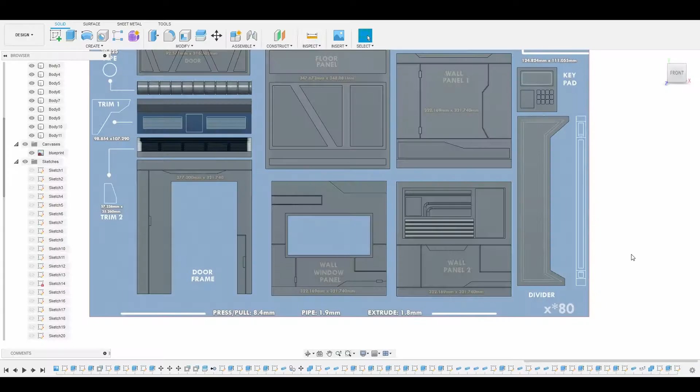Welcome back, guys. So let's begin with the divider. Now this is going to be really quick and simple.

Let's select the surface and right click, go to create sketch. And let's use our offset tool, which is the letter O on the keyboard, or you can go up to the top and select the icon. Now we're just going to dial this down to somewhere around here. Right click, hit OK. And we're going to right click and go up to repeat that offset command.

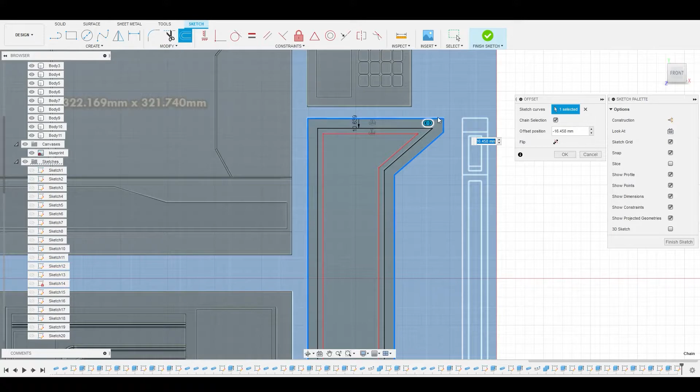We're going to select this outer border again. We'll just dial this down even deeper to follow that reference. And now we won't grab this inner piece or the outer piece, but instead this middle piece. And we'll press pull this by -1.8.

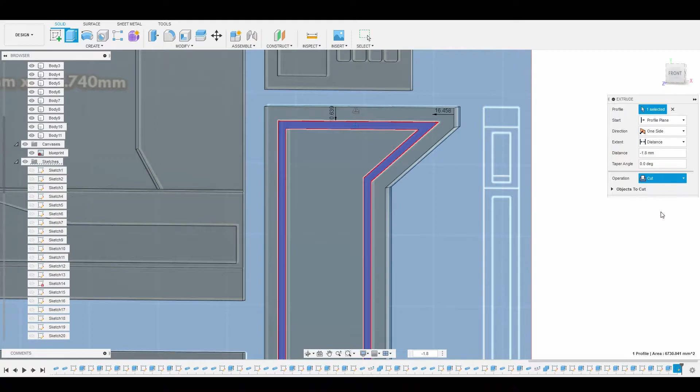And instead of changing the operation to cut, let's do a new body so we can mirror this. So if I toggle off the canvas, we need to mirror this body to the other side here, because this will be the divider between the different panels.

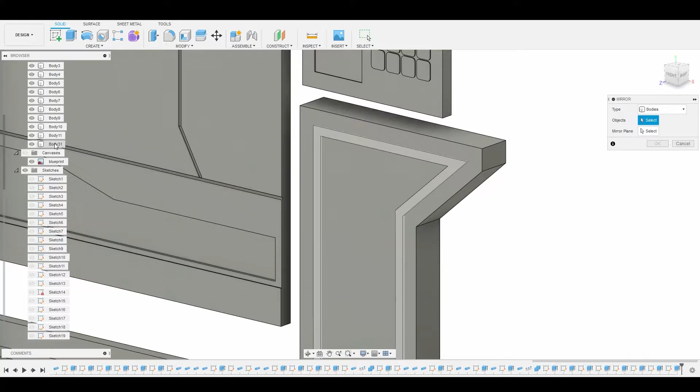So let's go to create, mirror, ensure the type is set to bodies, not faces, and let's select this body here. And if you can't select it here because of the overlap, you can just go to the bodies layer and select the one all the way to the bottom. And now where it says mirror plane, let's select that and let's choose this plane here. Now quickly you see it's on the other end, so let's hit OK.

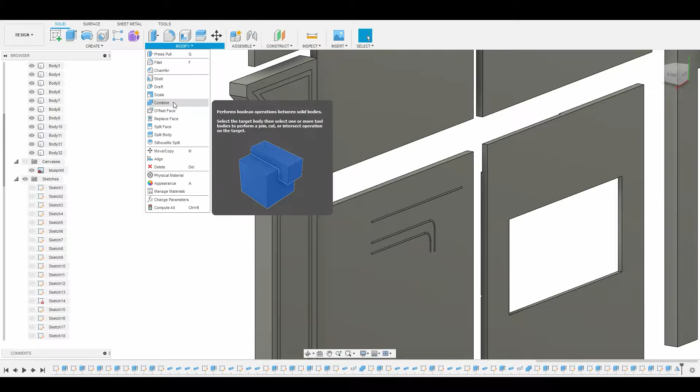Now we can combine this main piece with the two bodies. So we'll go to modify, combine, select the main body. Then we can go to the bodies layer and select these two at the bottom. And quickly you see it's highlighted red, indicating it's a cut. So to confirm that here, let's hit OK.

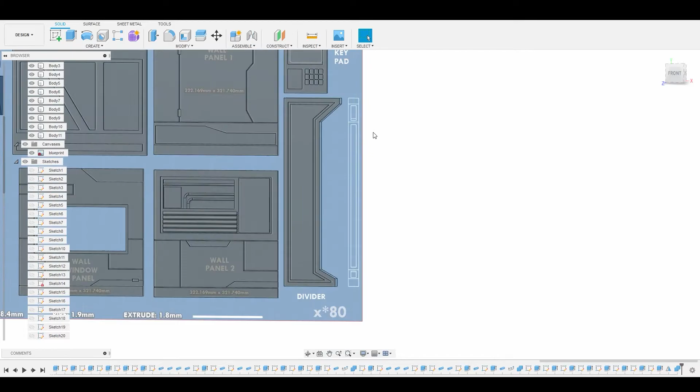Now we can toggle back on our canvas. Now let's get this frontal detail here. So what I'll do is select this surface, go to create sketch,

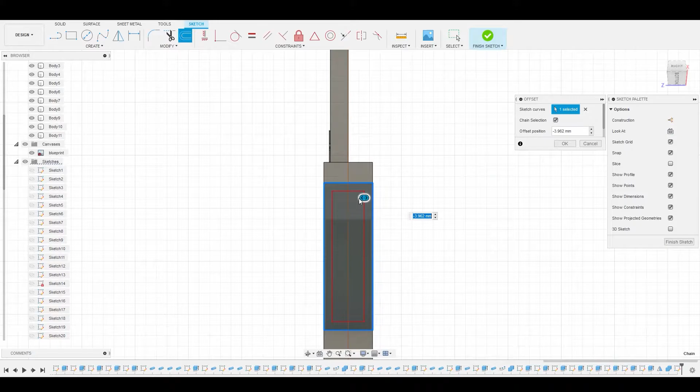Use the offset tool, and I'll just offset this by somewhere like this, -3.9. Let's hit Control C to copy that offset command, and let's hit OK.

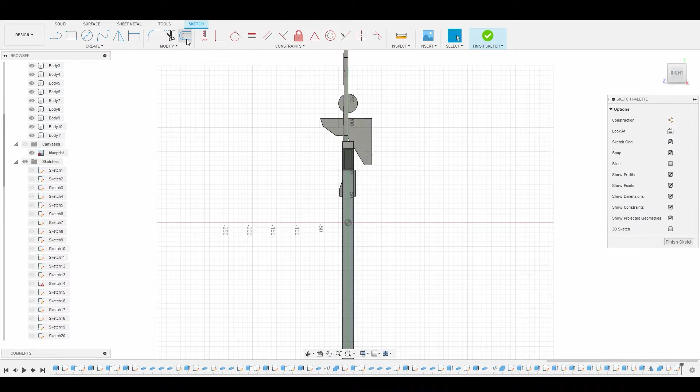And I want to do the same for this area, so I'll finish sketch. And I'll toggle off the canvas for this point. I'll select this side face here, right click, go to create sketch, select my offset tool, now select the border, and we already know that I copied the last parameter, so all I have to do is hit Control V to copy and paste that offset from the previous offset, and I can hit OK, finish sketch.

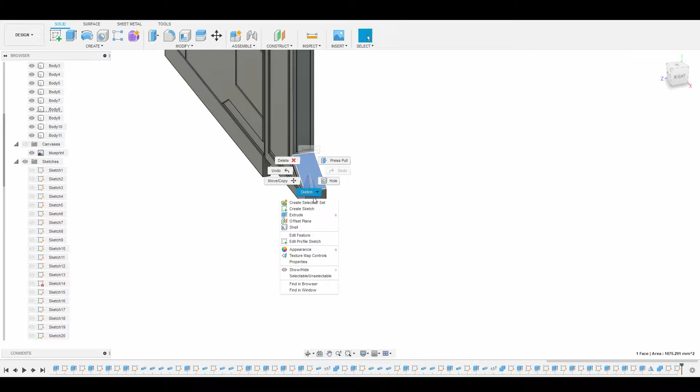And I'll do the same for the bottom piece here, so I'll select this surface, right click, create sketch, select my offset tool, now select a border edge, Control V. Just that simple. Let's hit OK.

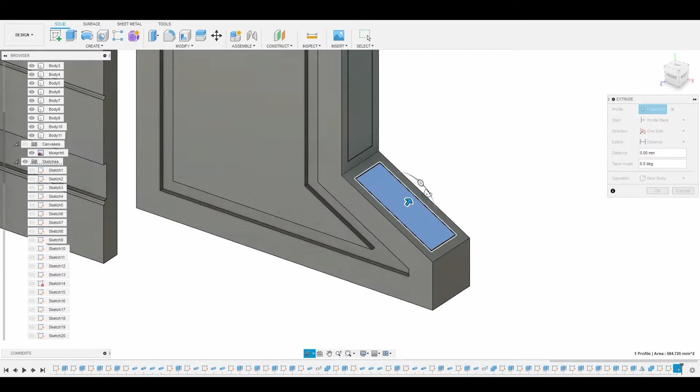And now we'll just offset this. So we'll go to finish sketch, select this profile, right click, press pull, and we'll take it down by -1.8. Ensure the operation's on cut, hit OK.

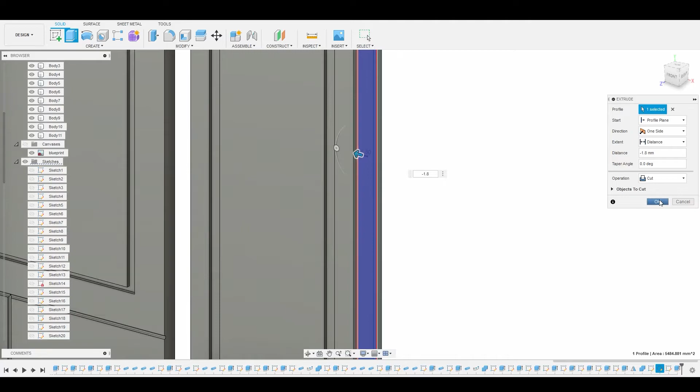Do the same for this piece here. Select the profile, press pull, enter the values -1.8. Ensure it's on cut, hit OK. Rinse and repeat, guys. Press pull, -1.8, hit OK. Now we're done with the divider.

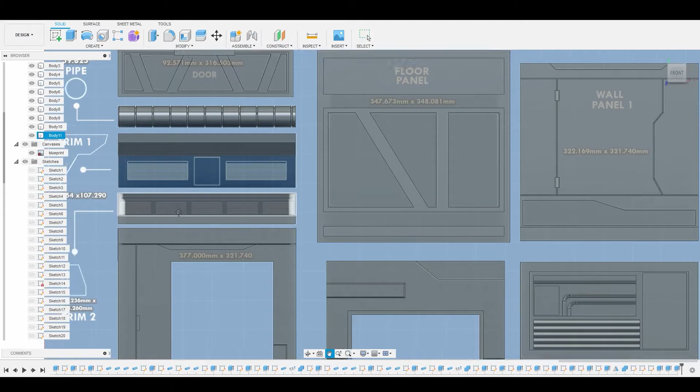So let's start working on the trims. So the trim will be on the bottom, so let's turn on the canvas. And we'll start with this. This seems to be the most simplistic.

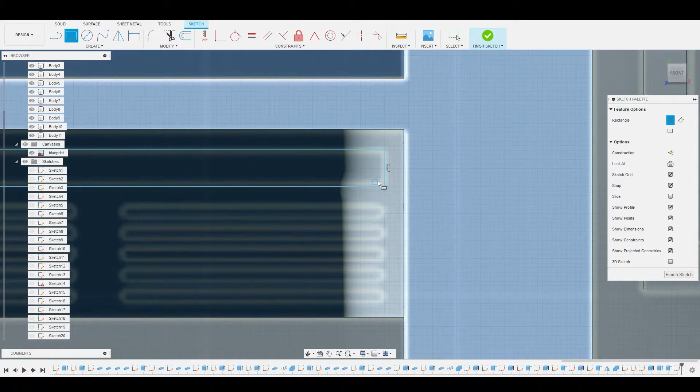So we'll select this surface, go to create sketch, go back to the front view so we're not at an angle. And what I'll do is use the 2-point rectangle tool from this top left corner, and I'll drag it all the way down to the right and go to the bottom, right click or left click, finalize that. Now I can right click, hit OK, and I'll press pull this by -1.8. Ensure the operation's on cut, and I'll hit OK.

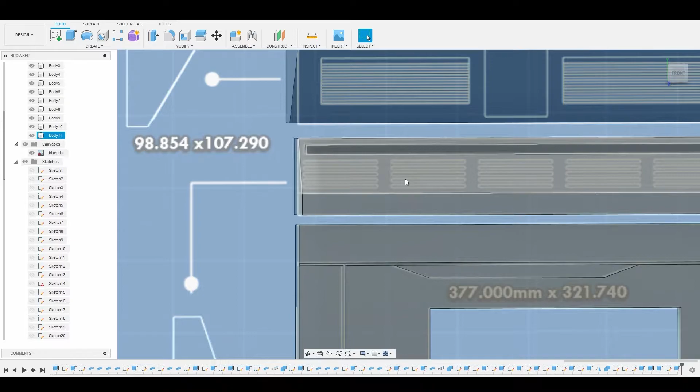Now let's start getting this detail here. So for these slots, I'll select this surface once again, right click, create sketch, and go back to the front view so we don't distort our image. Let's use the slot tool. We'll go to the create drop down, go to slot, center to center slot.

We'll just do one of these. From the center point before it starts to arc, we'll drag this line down to somewhere around here. Left click again. Now we can drag it out to mimic that cutout shape, and left click to complete that. Now we can right click and get out of slot mode.

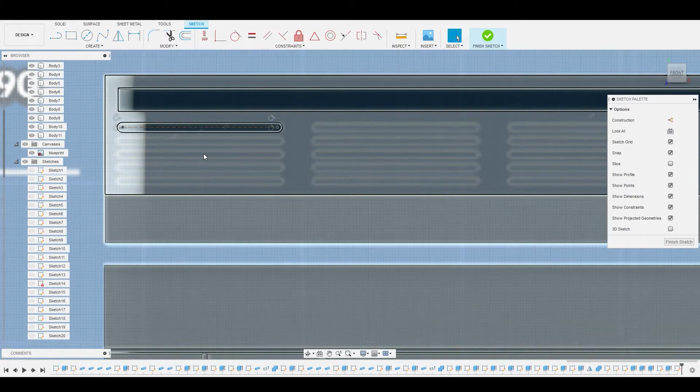Now we want to duplicate this about 5 times, so 1, 2, 3, 4, 5. We'll go to create, pattern, and do a rectangular pattern. We'll double click this line here to select the entire line, and basically move this.

So if we go back down, we want to move this down by this arrow. We'll bring this top arrow down, right? To do that, we'll slide it down to the bottom here, and change the quantity from 3 to 5.

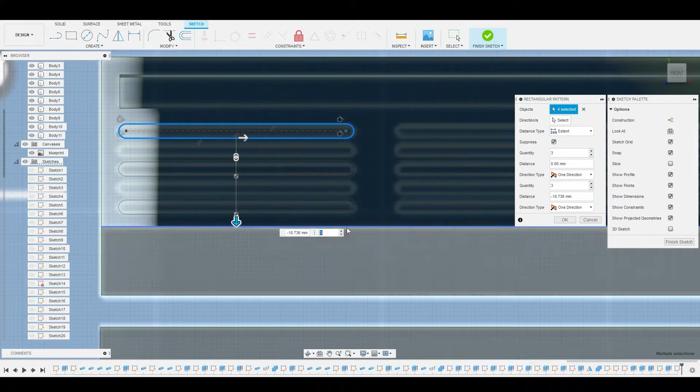Now we'll slide this right arrow over to the end, somewhere right here. And then we'll change the quantity from 3 to 5. We'll hit OK to finalize that.

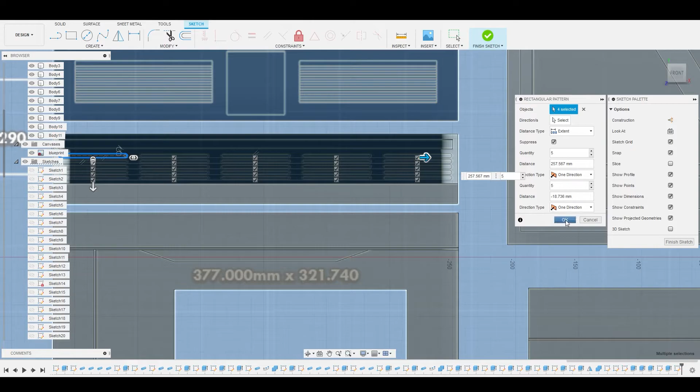Now we can go to finish sketch, turn off our canvas so we can see this a bit better, and we just want to shift select all these slots. Remember to hold down shift while you're selecting this.

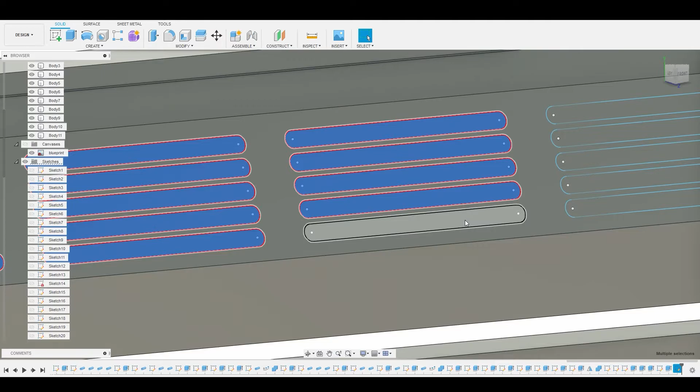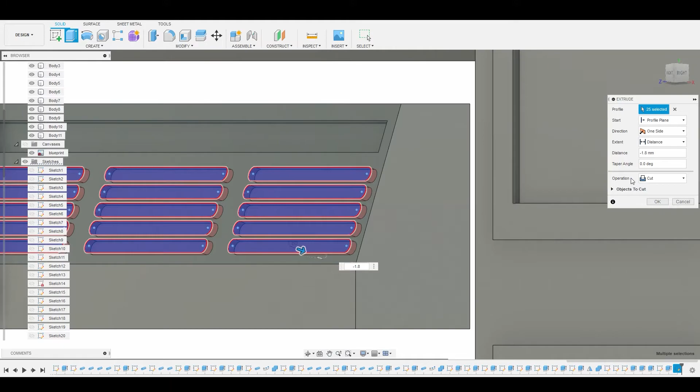Once we have those all selected, we're going to right click, press pull, and press pull these inwards. So -1.8. Then we'll ensure the operation is on cut and hit OK.

It's nice and beautiful, looks great. And actually we do have enough time to finish this last trim here.

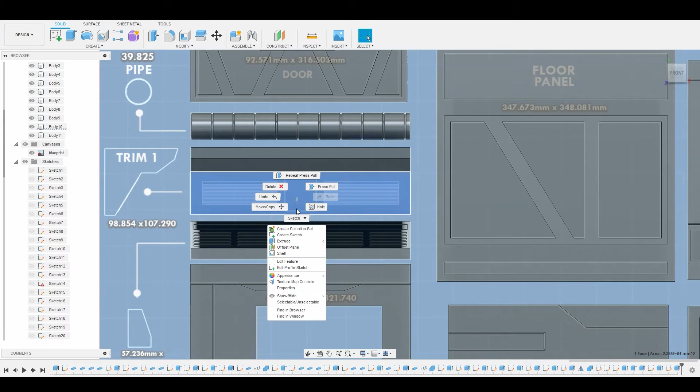So to do that, what we'll do is toggle back on our canvas, select this surface here, right click, go to create sketch. We'll go back to the front view by selecting this front icon on the view cube, so we don't get a distorted image.

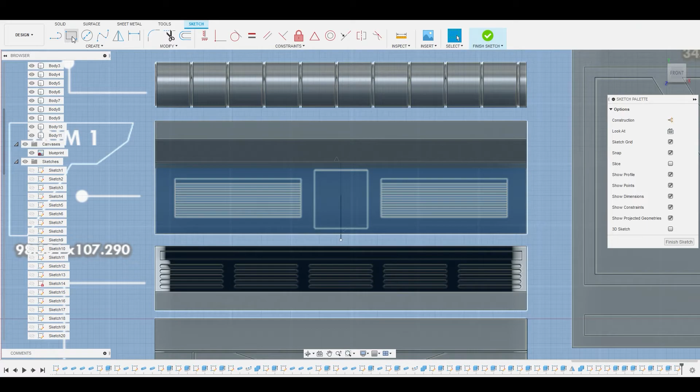And what I first want to do is draw a line down the center. Remember, you'll get that icon that indicates we're in the center. We'll just draw a line going straight down. Right click, hit OK. Now let's use our 2-point rectangle from this top line here, and drag it

to the bottom left on half of the model. And we'll use a 2-point rectangle tool again from this top left corner to the bottom right. Right click, hit OK. Now we need to mirror this to the opposite end.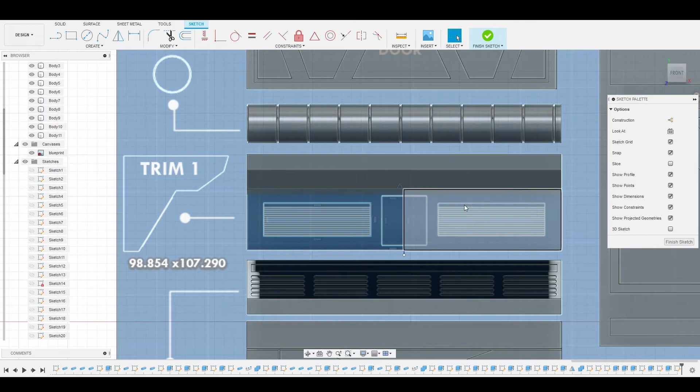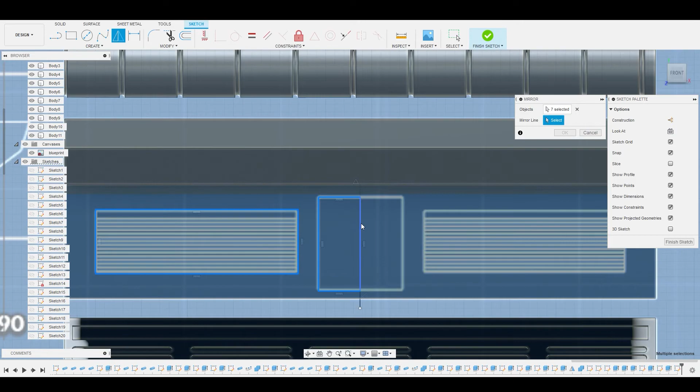We'll do that easily by going to create, mirror, select top, bottom, left, right, and top, side, and bottom. Now where it says mirror line, we'll choose this center line. Now we'll hit OK. Now we can shift select both of these profiles here, so we can right click,

press pull, and we want to press pull this in by -1.0. That's it. Ensure it's on cut, hit OK.

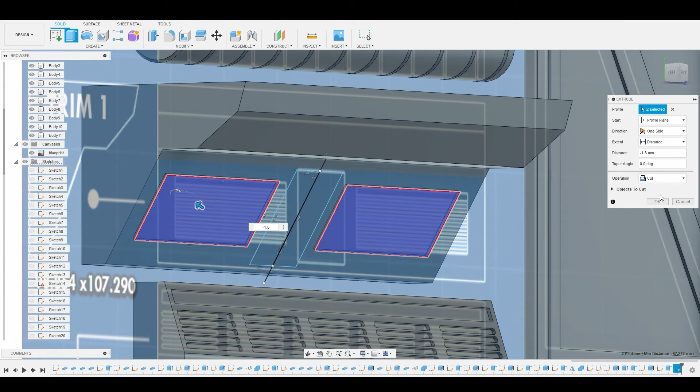And let's toggle back on that last sketch so we can shift select both of these rectangles to press pull them at the same time to give us one shape, and we'll make this 1.8. Ensure the operation is on join and hit OK.

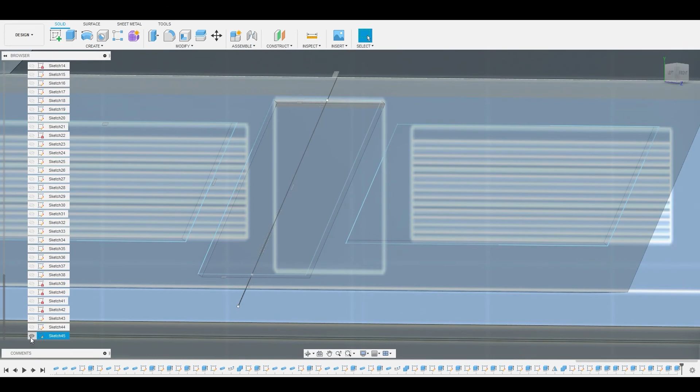Now we can toggle off this sketch, and if we toggle off the canvas, we'll see what we have here. And this actually looks good. We actually don't need that detail on the inside just yet if we don't want it.

So we can actually add some detail here in Substance Painter. We're actually done with the details. Hopefully I didn't lose anyone, and we'll catch you in the next video.